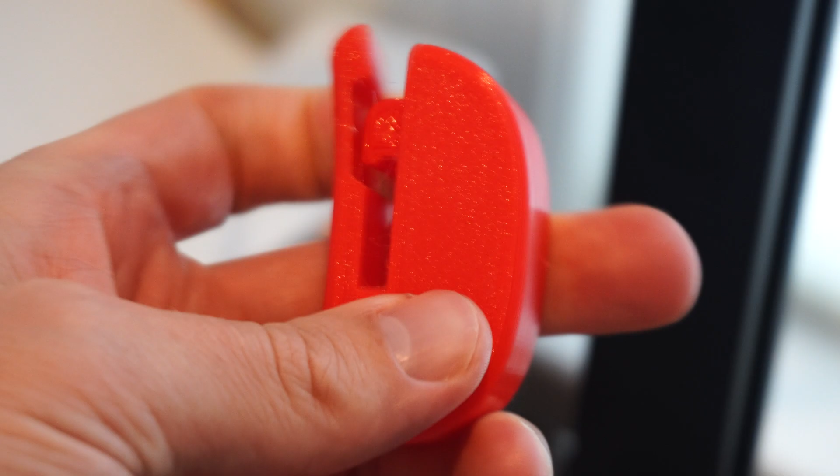And today, we will be continuing my CAD design approach and thought process for the 3D printable Chameleon VR holster, which fits Meta Quest 2, 3, and even the original Oculus Quest. That's right. We're going to be covering how I came up with the attachable squishy TPU tongue, which helps secure your phone in place while gaming in VR, so you can always have it within arm's reach.

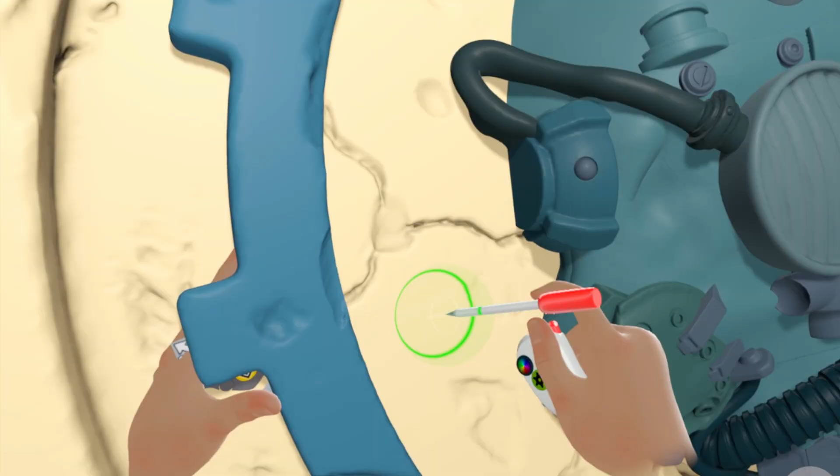This was the most challenging part I've ever created, but I want to show you how someone like me with zero experience and who is more on the creative side, which is why I love VR sculpting, is still able to use CAD to get the job done. So if that is you, this one is for you.

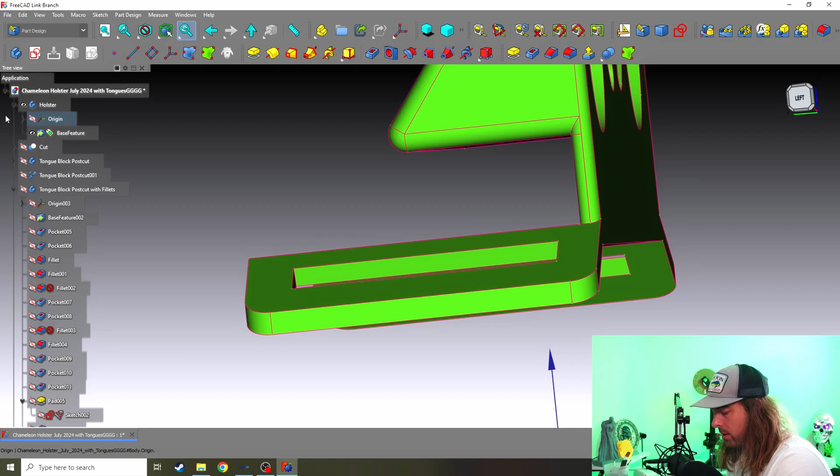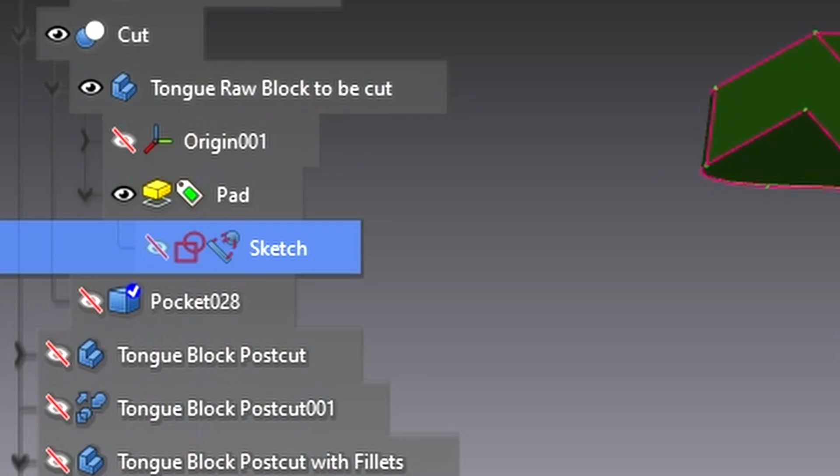In order to design the tongue that you see here, which was the trickiest part, I had to reference the original holster that I designed. So here's the holster with the lettering on it, and I used these points on this body here. I referenced those to make a new sketch or a new body for the tongue. I used that body, I imported it. I literally just made a block right there. I did a boolean where I cut the holes from the holster out of the block. That's what you see right here. Okay, I let it do the work for me.

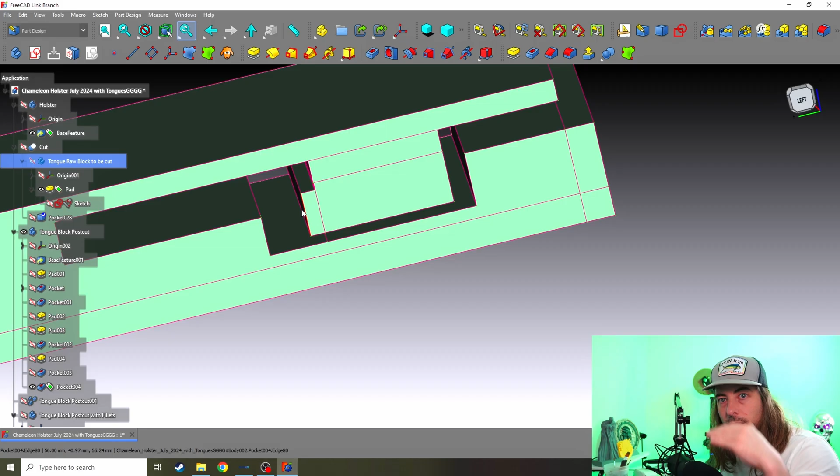Now I had to go in order to get this. You could see that I did go in and I did a little bit more work, but it was just a series of sketch on this surface and then pad it out, sketch on this surface and subtract, pocket it. So it's just pads and pockets, pads and pockets. That's what I love to do. That's my approach, pads and pockets. If I don't get something perfectly accurate the first time, I can always pad or pocket it to get it just right.

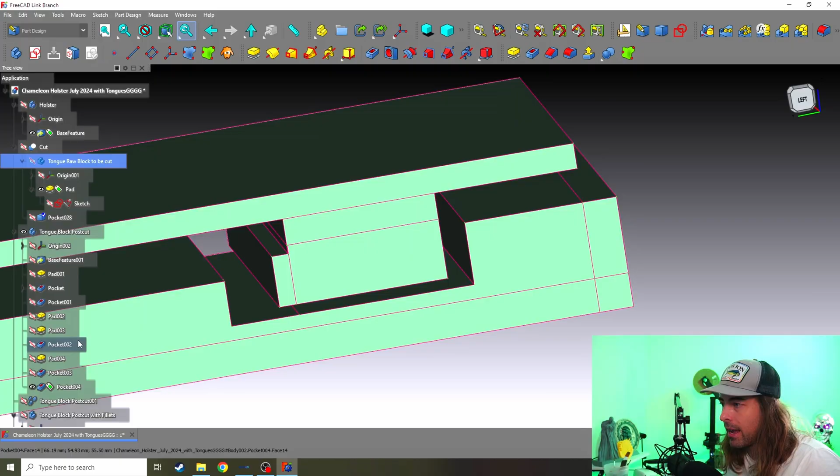You can see right here, I padded up out to here, and then I pocketed. I think that's pretty funny. And then I went through and I refined the shape right here. I refined it, so now it's all like one piece, mostly, and it's like two pieces. I started to add fillets. I added the fillets, which are these rounded parts. So you click on the edge and you go up here and you select fillet, and then you choose your radius.

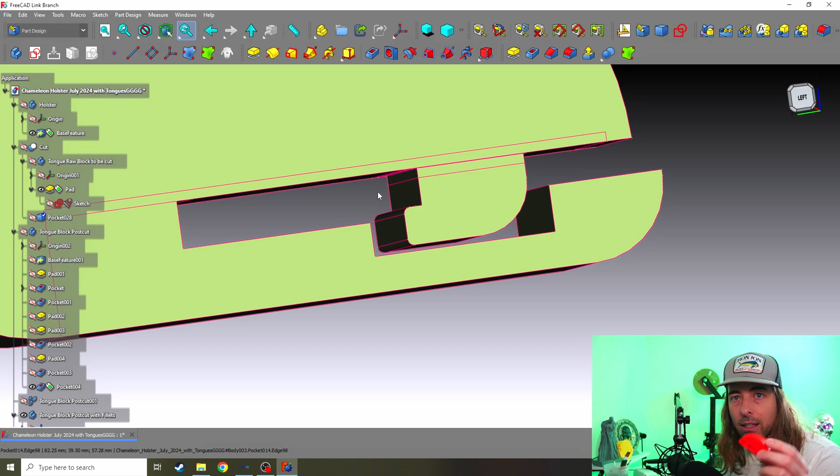How much you need. For this one, I really didn't need fillets. I just wanted it to fit in real nice. And it turned out really good. I hope you can see that. The fillets just make it a little bit smoother. Like I said, when I think of the concepts, I think of how this stuff interacts and slides through each other, and it's a cosmic dance. That's what I did. So I made the fillets to make it a little nicer.

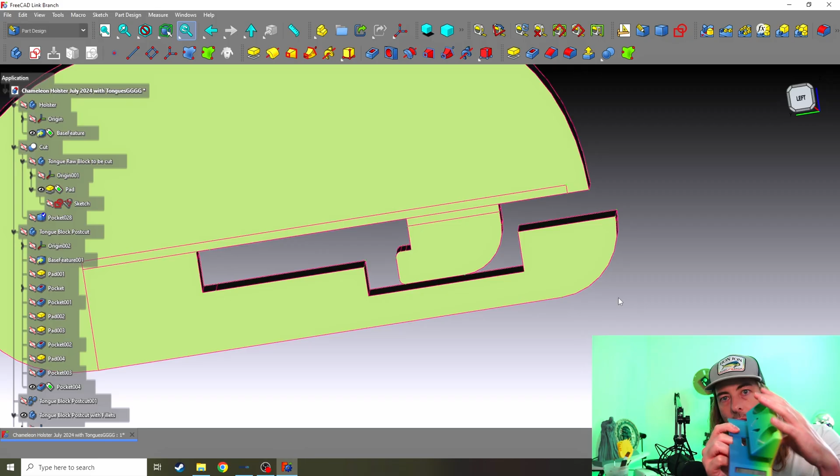If it was just square blocks, just imagine, it's harder to get square blocks to fit into tight spaces with other square blocks. It's a lot easier if it's more smooth and rounded. It gives you a little wiggle room. You're gonna need that wiggle room in your life.

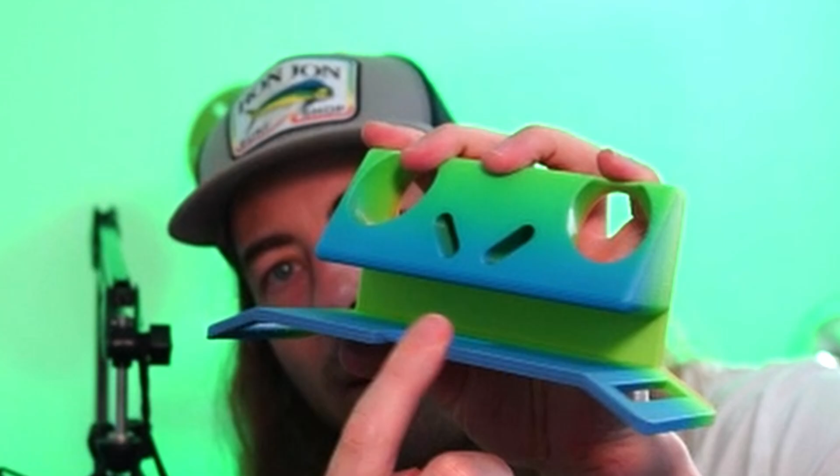All right, so I had the pockets, and you can see I did go in and I pocketed the sides to give me room so that it could fit in there. I pocketed the sides so it can fit a little bit better. If I didn't, it's too flat and it doesn't quite fit in the right way, and all printers can give different results. Different slicers can give you different results.

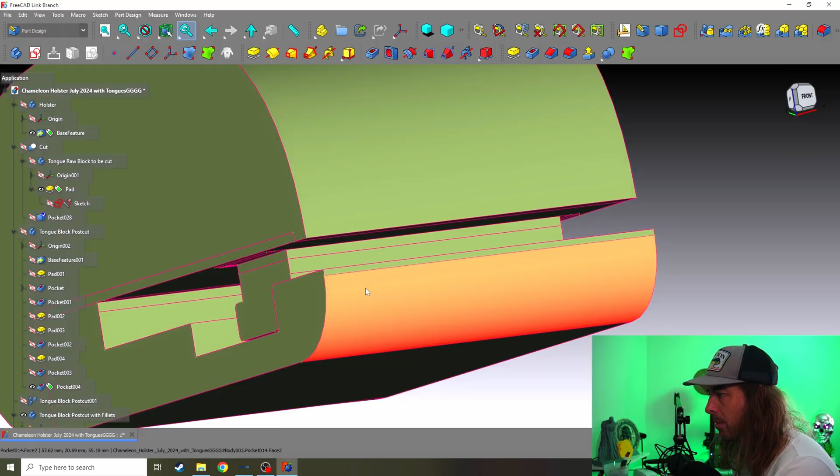If you decide to print the outer walls to the inner, different results. This is stuff you need to think about. This is the way that you need to think when you're designing this. But you can see I went in and I did a series of pockets and fillets. And then stuff worked, stuff didn't work, and I just kept going and going and going.

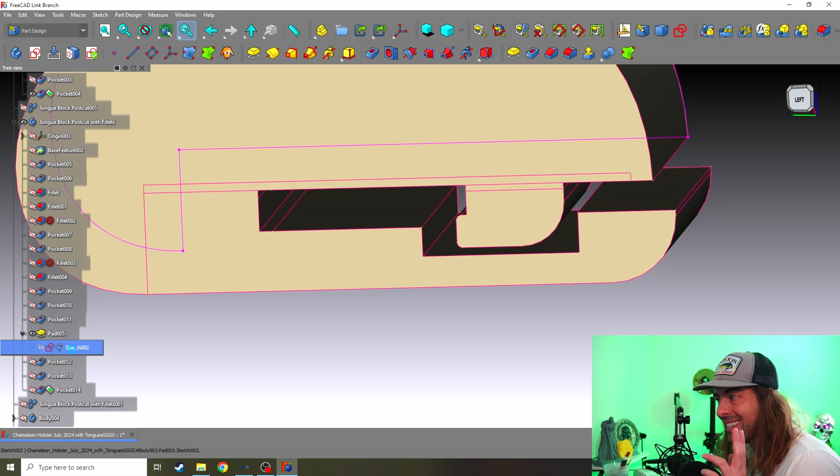But you can see I added the actual tongue part, okay? That actual tongue part, I'll show you exactly, and then I'll wrap this video up. Okay, here it is right here. So you can see I had the original block, right? And then I went in and I sketched this monstrosity, all right? This is a B-spline. So if you look up here, this is a B-spline, okay?

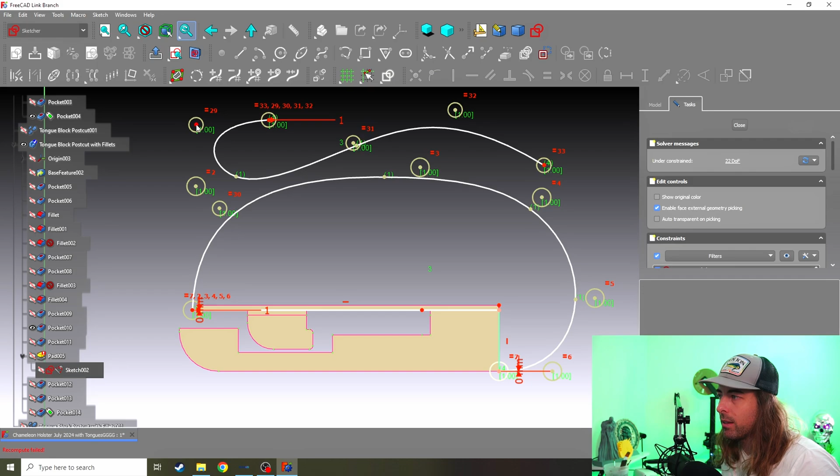B-spline lets you do these, you do this, and then when you're done, it creates this curve, and then you can go in and you can move them around. The problem is with the B-spline, a lot of people that use FreeCAD don't like to use B-splines because they're a little less accurate, and you can put constraints in between these 2 points here, but it's really, really annoying.

You can't say, oh, this curve is this radius. Keep it this radius. Don't let it move. It doesn't let you do that. Okay, you can put constraints between different points so they don't move around too much, but it's a lot more work. That's a B-spline. It's a great tool, but it kind of gets off the rails.

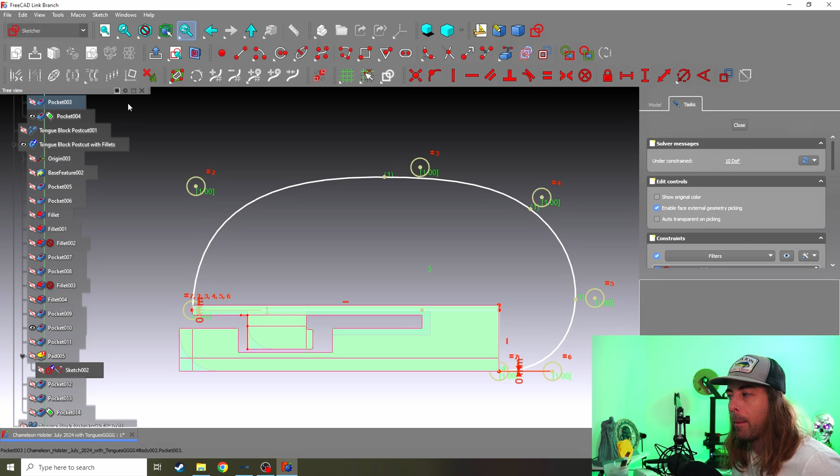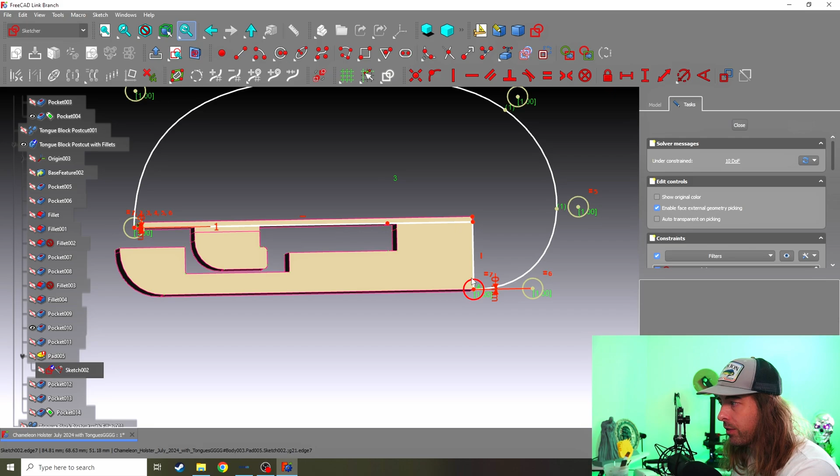So I had a little bit of trouble attaching it just right. I had to make a very flat line, which you can't see here. Here it is right here, this white thing. So I made a flat line that was not on this line. I made it lower. You can see why, because I needed this part to be down here, not up here. I made the flat lines first, and then I used that sketch create external geometry. I used that to reference this block that I already made.

And then I added these B-spline points. I adjusted it just by hand. I just guessed. I have two shapes and I guessed both of them and they turned out so good. Like the first one I did was this more cartoony one. See, the angle is a little different. Whereas this one that I'm showing you on the screen is more flat. I just guessed and I got them right.

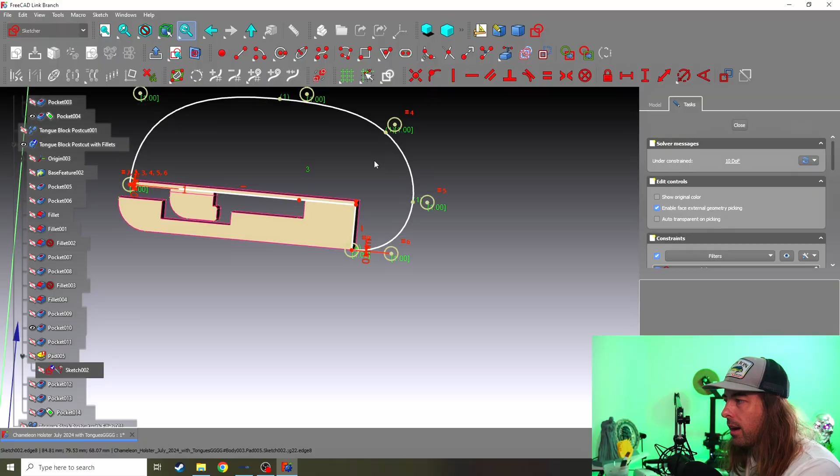And the cool thing about TPU is the more infill you do, the more lines that you add, like the more layers of the outer walls, the outer shell that you add, the thicker it is. So you can control exactly how squishy it is. So you can have a really, really tough tongue. If you print 100% infill with this squishy filament, it turns into like an eraser.

It's like a solid. And you can bounce it off the ground. It's a plastic. What was it called? Thermoplastic polyurethane or something like that. Anyway, it's like rollerblading wheels or something. I have no idea. Okay, and this gave me a massive headache. A massive headache. It wasn't so bad settling on an acceptable tongue.

What made it bad was I had made a few changes to the original holster. I had to redo like this part. I had to go in and redo these. I had to completely redesign these after I had already designed them. So that's how I did it.